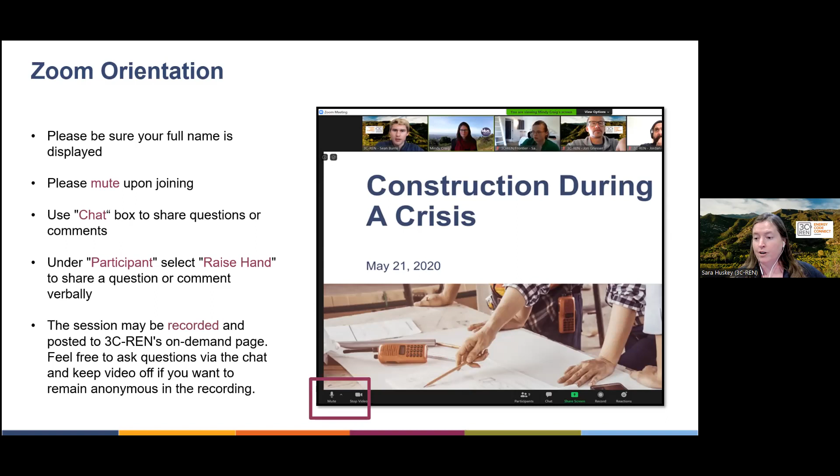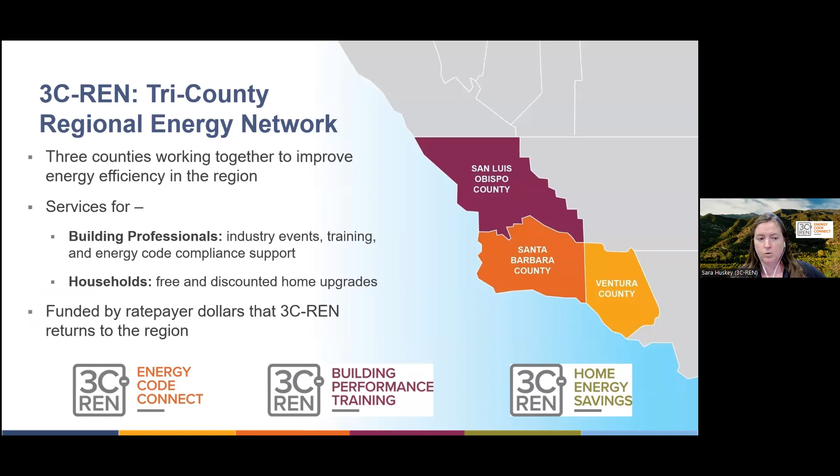A few words about who we are. We are the Tri-County Regional Energy Network, also known as 3C-REN. We're a collaborative partnership between San Luis Obispo, Santa Barbara, and Ventura counties, working to improve energy efficiency in our region by offering free programs and services for building professionals and households. 3C Ren is funded by ratepayer dollars, which are collected through the public goods charge found on our utility bills.

3C Ren currently offers 3 programs. The first is our Energy Code Connect program, which this course is brought to you through. This program offers our Energy Code Coach service, which is over-the-phone, online, and in-the-field support for Title 24 related questions for both residential and non-residential projects. Then we have our Building Performance Training program, which serves building professionals by offering technical and soft skill trainings relating to building science principles and high performance buildings.

And then we have our third program, which is our Home Energy Savings program, which incentivizes contractors and helps residents save money to make their homes healthier with energy efficient upgrades through incentives and rebates. And with that, I'll pass things over to Jennifer.

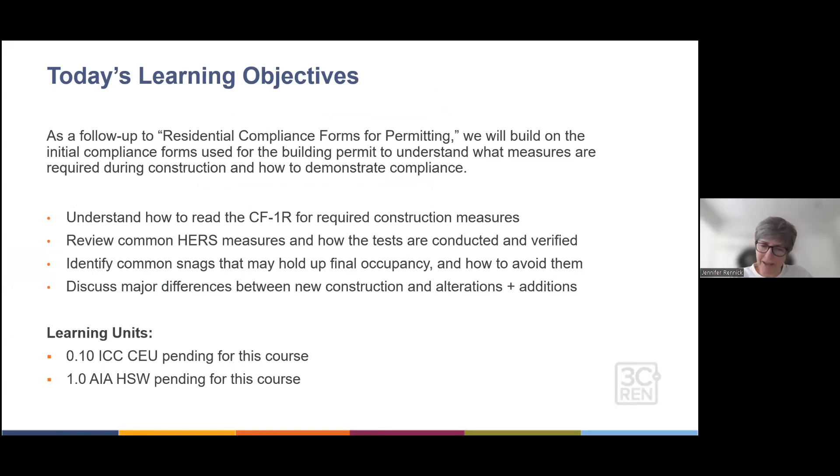We did a class just recently, a few weeks back, and it was the overview of the forms for residential single family construction on the permitting side. We mostly talked about the CF1Rs to show compliance with the energy code and gave everyone a heads up on what a plans examiner might look at, and also gave architects and others an overview of what these forms look like and where to find the information needed for a project.

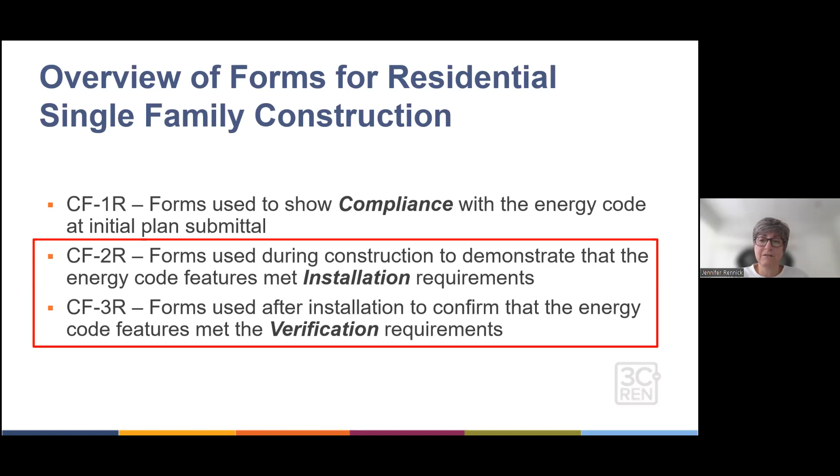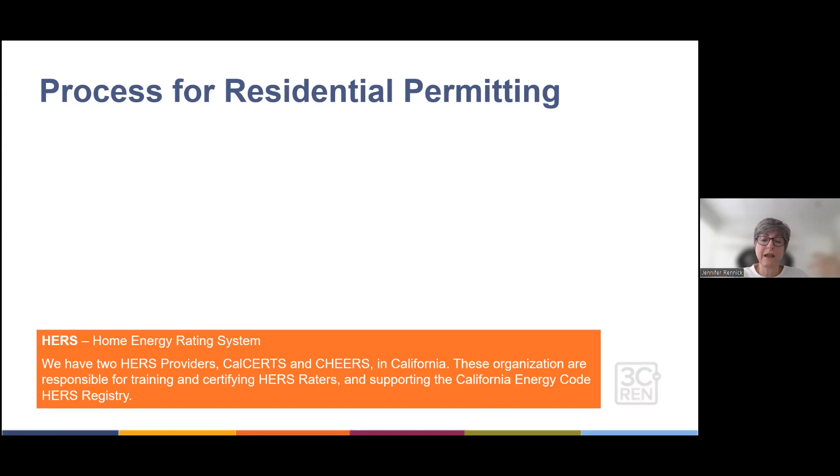Today we're going to specifically look at some of the CF2Rs and CF3R forms for installation requirements and verification requirements. California has HERS, and I could tell from most of the chat that most of you know this already, but in case we have a few new people joining, and also because it's being recorded and might be posted to the website, I'll review that HERS is Home Energy Rating System. In California, we have 2 HERS providers currently, CalCERTS and CHEERS.

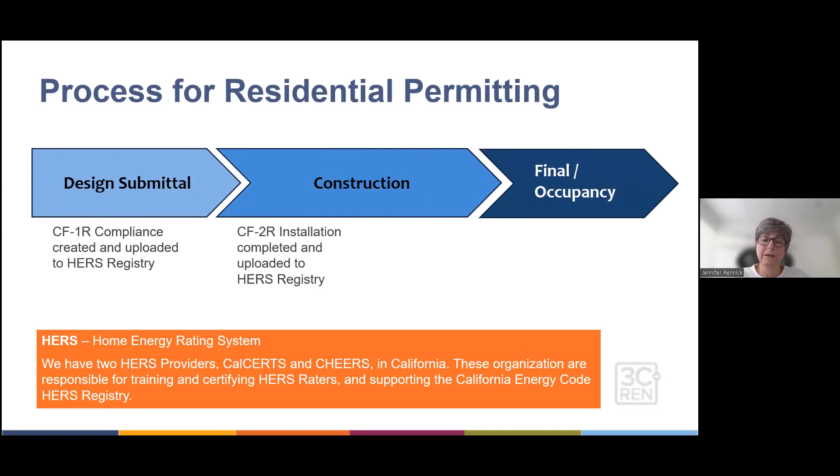These are the organizations responsible for certifying our HERS raters and supporting the California Energy Code HERS registry. The big picture process: you submit your design for permitting, and you'll have your CF1R compliance report created and uploaded to the HERS registry. During construction, you'll have your CF2Rs for installation completed and uploaded to the HERS registry, and your CF3Rs for verification completed and uploaded to the HERS registry. Then the building official can confirm your CF2Rs and CF3Rs are uploaded and signed, and CalCerts has what's called the PSR—we'll take a look at that slide coming up. Once that process is done, you can get your final occupancy.

On CalCerts, this is just an example from a project I have on CalCerts. What I could see on my end as an energy analyst is a list of the CF2Rs and 3R forms that would be required. This is not an exhaustive list, but these are the ones that populate for the particular project I was working on. And you'll see things like electric ready requirements.

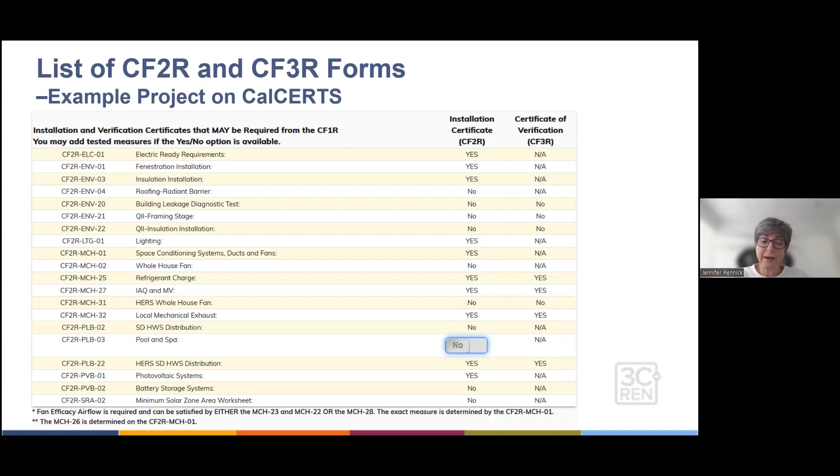CF2Rs required? Yes. CF3Rs required? No, not applicable, etc. This is what we're going to see with your plans examiner. I think we have a plans examiner in training. A lot of times on the planning and building side, if you go onto the CalCerts registry, you'll see this PSR report. Okay, Paul, jump in and tell us a little bit about it.

This is usually seen towards the end of the project when you're calling for final. Jennifer, can you back up 2 slides? Let's go one more. Yeah, here.

This is the theoretical flow of things, but oftentimes as a rater I get called right before final because the agency is asking for certificates and paperwork. So to make it go more smoothly, us raters would like to ask people who are creating energy compliance documents to communicate to their client, i.e. builder, architect, whoever, that this needs to happen. Let's try to put it right on the plans so that this special inspector known as a HERS rater can get in front of it and communicate with the various subcontractors what needs to happen, so everything flows smoothly and we don't have any hiccups right at final when people are sitting in their moving van outside on the street, waiting to get finals.

I've literally been in that situation before. So skip ahead 2 slides.

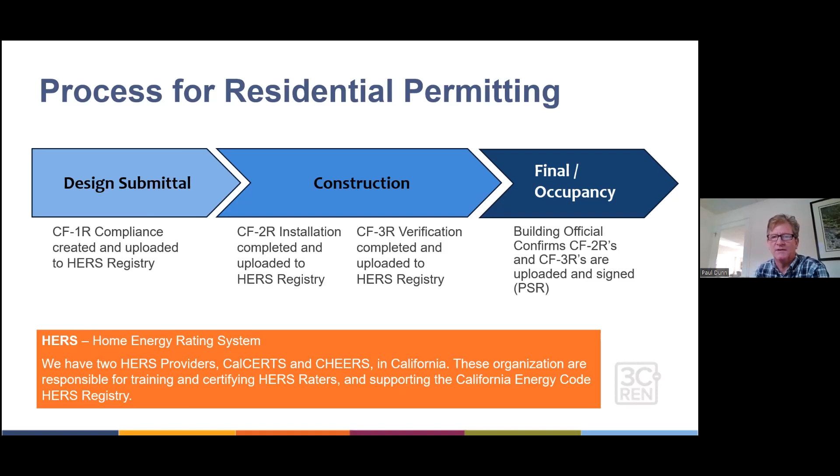At that point in the game, say the building official is looking at the project summary, he wants to see, for the most part, what we call all green dots. That indicates to them that all the subs and their responsible forms, the CF2Rs, have been completed either by the sub or the rater on behalf of the sub or the general contractor, because they can oversign pretty much anything in terms of an installation certificate. As a service, as a HERS rater, I generally do that on their behalf just to make it go more quickly. Then we ask that sub to go into the registry and approve that data uploaded on their behalf by me, because I'm at the site anyway collecting data and uploading it in the comfort of my office come close to final.

So we're ready for the next one.

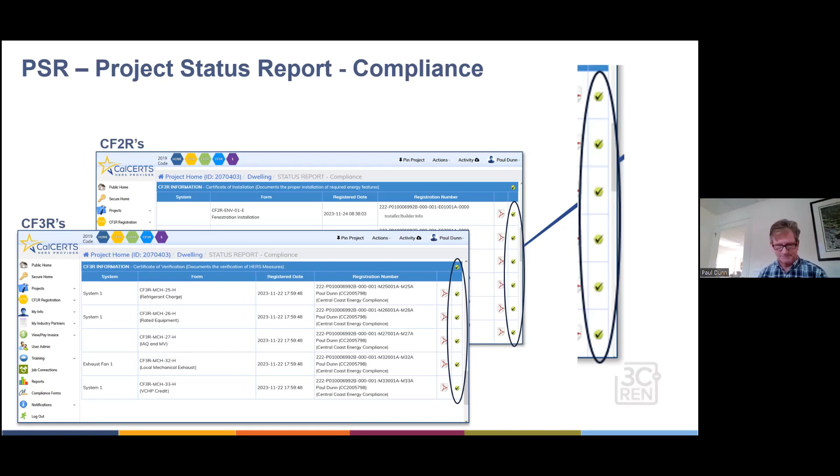As energy analysts consulting to builders and architects, one of the questions that comes up is, how do I know what these forms are? What are the requirements? What are you talking about? It seems like a lot of it is learned through trial and error and experience. I've even had architects and builders tell me, I've learned what to do because I get corrections on plan check, so over the years I've learned what I'm supposed to be doing.

So my feedback is, is there a way to not bury this so deeply into the website? Say that with a question mark, because I know redoing a website is a big deal, but it would be cool if there would be a way for folks to navigate to this without scrolling down, because they ask me and I point people to it.

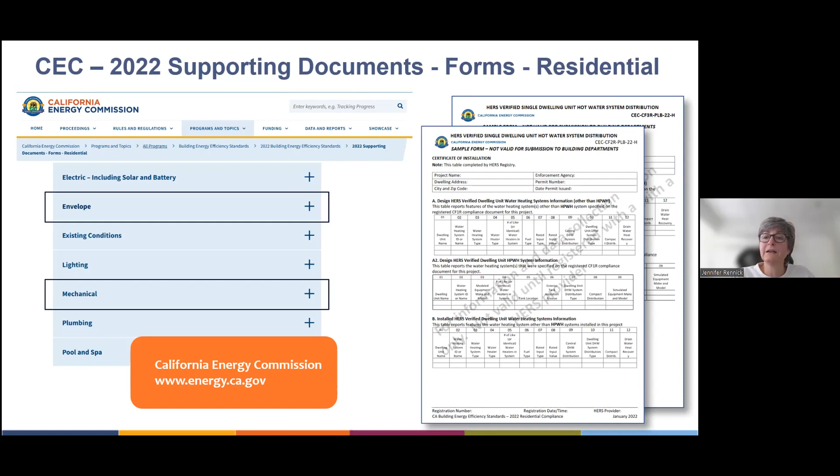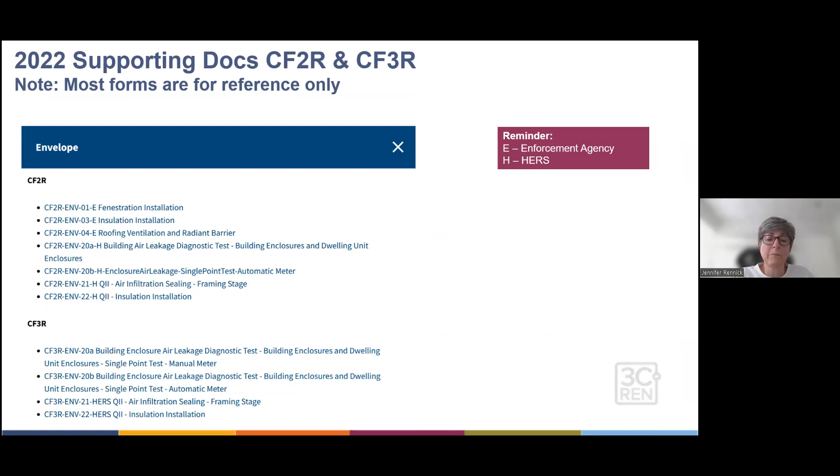So to give you an idea of what this looks like, when you click into the website on envelope, for example, these CF2R and CF3R forms populate in a list like this, and you can click on this list and click on each item, and then you'll be able to download that informational form, watermarked informational purposes, but at least it gives you all the information.

Today, specifically, we're going to take a look at the form that deals with the insulation installation and the corresponding QII, quality insulation installation forms.

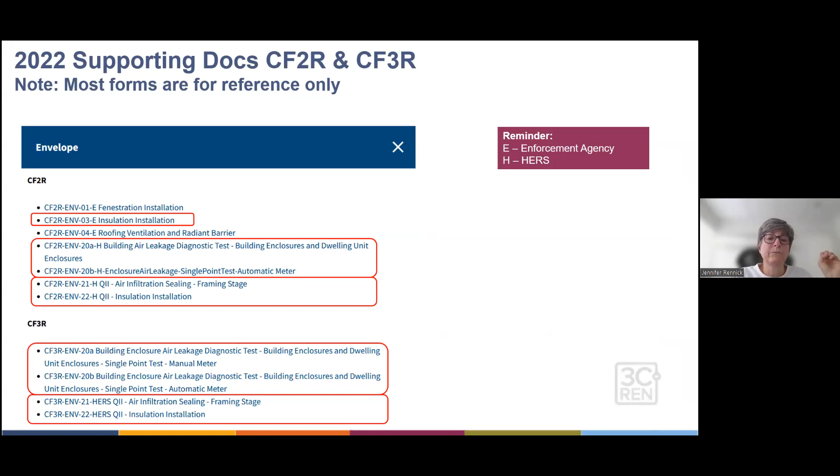The first time I ever looked at this, it was overwhelming to me. But then when I dug into it a little deeper and started to organize it in my own mind, maybe even a formatting issue if the CEC has control over this, is maybe just separate it out a little bit so you could see more easily that it's really not that many, in the sense that there's groupings, like the MCH 1 series for different conditions.

You're all going to get a copy of the slides, maybe share it with other folks you work with. This may help them see the hierarchy in it.

Today we're going to hit on the forms that deal with QII and building enclosure, which overlap with that. Then we're going to go into a little bit about duct leakage testing, what it is, and there's supporting forms that go with that. We're going to take a look at local mechanical exhaust, kitchen hoods specifically, just that one, and a little bit about variable capacity heat pump compliance credit, because that's a great credit.

Specifically, we're going to look at duct leakage. These are the supporting forms highlighted in mauve, how the color looks on my screen, that support that. Some of those other forms can be triggered with other systems, like refrigerant charge verification.

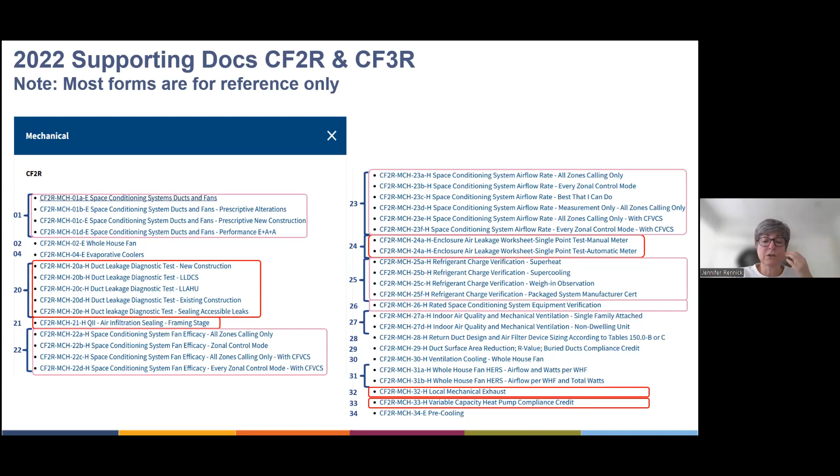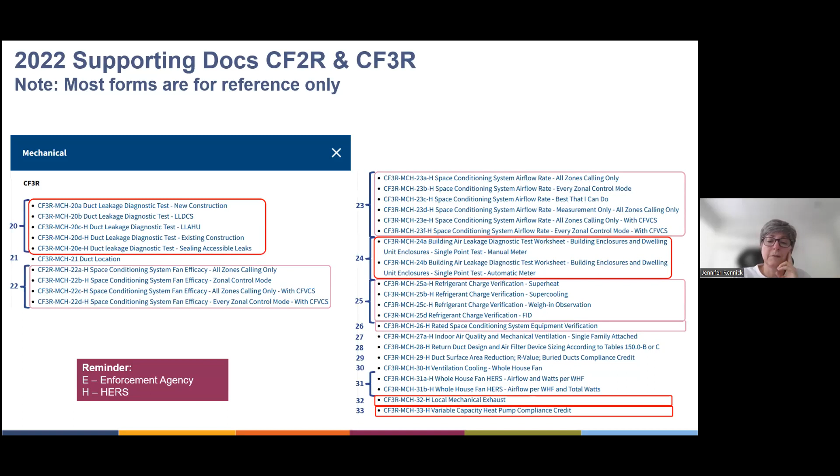Okay, so just the CF3R, same thing. There's a hierarchy to it, there's a grouping to it, and we'll hit on the building leakage, enclosure, duct leakage, local mechanical exhaust, variable capacity heat pump credit, and those supporting items.

If I may add - yeah, absolutely. So to the audience, don't let your eyes glaze over. There are a lot of forms there on the previous slide, but a lot of those forms are just kind of hovering in the background. You'll probably never have to deal with them. Your HERS rater will upload what is pertinent to the project.

And if there's any questions early on, say in CalCERTS training, they use the term rater as educator. So that rater should be able to explain to you, here's how we're going to complete this form, here's who's going to do it, and this is going to be the process. So don't get bogged down in 26 forms on a screen - really only 2 or 3 of those for the most part are going to be the most important for your project.

And when you share this kind of information with other folks, for those of you who are also HERS raters or HERS rater and plans examiner in training, really what I wanted to show you is that that information is available on a website. So if you know from that HERS rater what you need, or what kinds of things you're going to be looking at, you could share this with the architects as well, because sometimes there's information in that they can get into their drawings to make their world easier, but they won't go through the whole list. So you maybe help them by targeting specifically what they need.

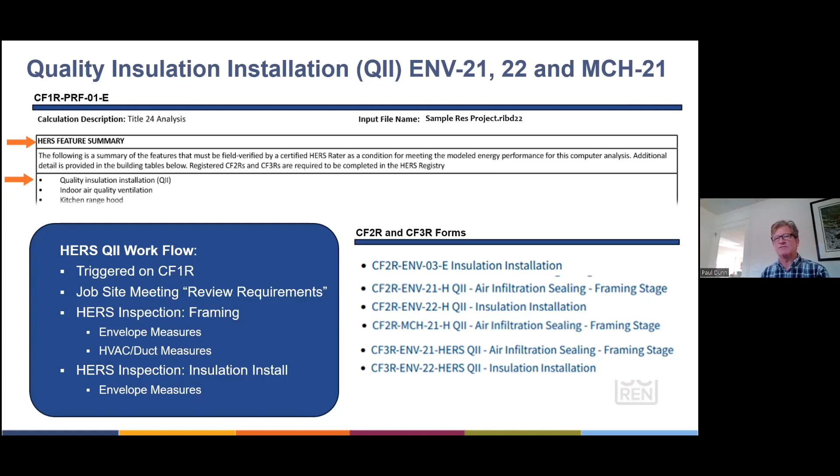Your rater should be able to walk you through that process as well. We want to get out in front of it so there's no problems down the line in the framing aspect, because really QII involves two major avenues: the first being air sealing, the second being the actual installation of the material. Under air sealing, if the rater can walk the job and say, okay, we have a unique framing situation, here's what we're going to need to do to get in front of that, it is really helpful so there's no problems down the line.

My example to Jennifer before, and I see this a lot on jobs, is in tract homes you'll have a lot of preformed fiberglass shower inserts. A lot of times they show up on the job really soon after framing, but we want to make sure we have an interior air barrier on the other side of that tub to make a QII-style sandwich, so that we have insulation contact on all 6 sides of a framing cavity. So let's get some kind of approved air barrier on the inside of that wall before you set the tub. That's why we want to walk jobs really soon in this process.

One of the first forms, this insulation installation form, it's a non-HERS form—it could be the installer or the GC. But I understand a lot of times you'll help folks get this completed. The reason I like to print this out and remind folks about it is because it's just chock full of really good reminders and information on what it's going to take for QII.

I'd agree. I think for the most part, the insulation contractors I work with in San Luis Obispo County are good with their CF2R ENV 03 because they know what material went to the site. Through years of training, I've gotten them to go ahead and upload that form. I chase it later with my CF3R ENV 21 and 22, which are kind of like the current forms for QII. So then it all kind of dovetails nicely.

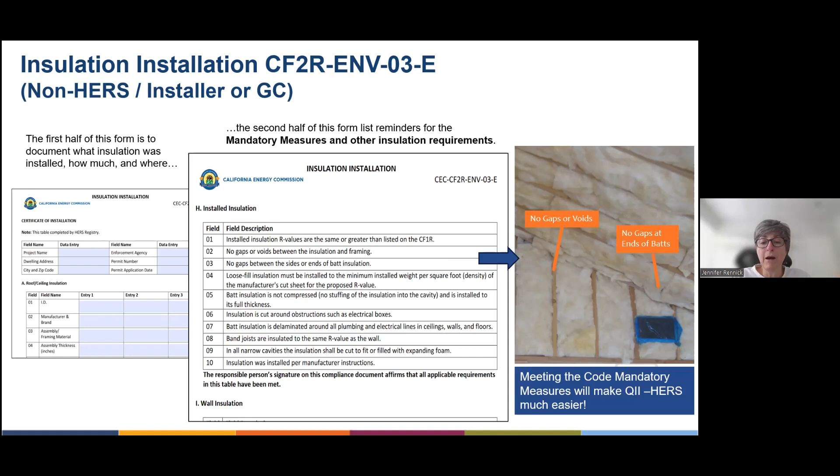For example, this first form, the ENV 03—yes, it addresses basically insulation installation, but prior to that, even though it's ENV 21H, the CF2R, this one's got to address the air sealing. It's part of QII, but a lot of this has to come before the actual insulation. So make sure this gets eyes on it before you start rocking or drywalling your job.

The rater needs to be there before you do that. I really think the rater at a minimum has two, most likely three visits to the site: a pre-walk, an air sealing inspection, maybe a fourth, and then a day-of-installation inspection, and then a final visit when they come back to do other measures. They can verify attic insulation at that point, and make sure they're meeting their R values and that all the boxes are checked.

Another great resource is the U.S. Department of Energy's Energy Efficiency and Renewable Energy website. They also have a great resource for how to do air sealing, especially air sealing for retrofits, which I find handy.

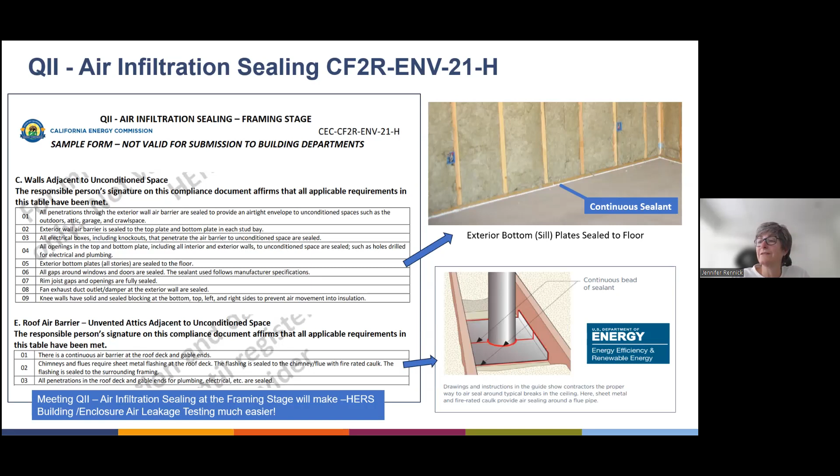Xavier says one of our fellow HERS raters does a PowerPoint for his folks at that review/construction on-site meeting. That's cool. Continuing on with some of the CF2Rs for air infiltration and air sealing—these are, that's a great picture that Paul shared with us from one of his job sites.

It specifically applies for new construction and alterations.

In an alteration situation, I put a graphic at the bottom right for folks to know that sometimes when you're doing those altered ceilings, and it's on this QII list, if you can't access those lights, if they're not ICAT rated (insulation cover rated), you can buy a box or create a drywall box with continuous fireproof sealant, keep it 3 inches off the light fixture, etc., lump your insulation over it, and continue on with the QII.

Anything you want to add on that, Paul? Yeah, one little caveat is fire sprinklers. Some manufacturers do not want you messing at all with their penetrations because of requirements in how they install things. So item 03 on that checklist, you might have to dance around or work with the manufacturer to see what you can do to seal those penetrations. There are new designs coming out for fire sprinkler systems, and that probably needs to be done on a case-by-case basis.

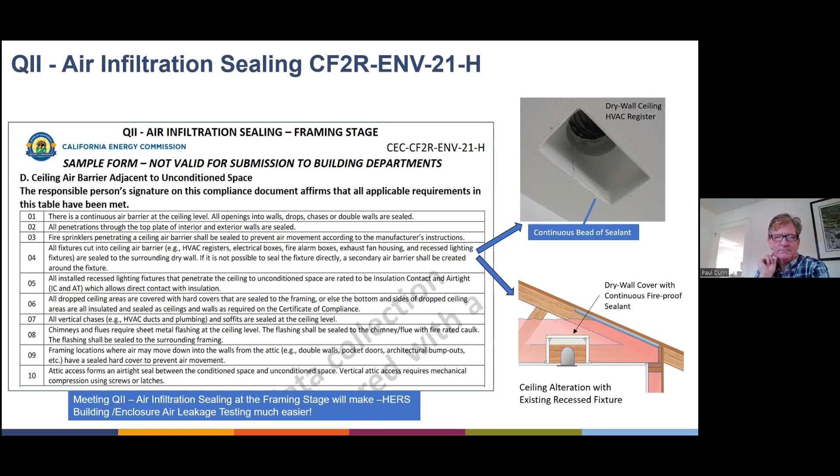And Paul, a lot of these things are the types of things you would cover in that meeting when you get those team players on site, and if you know, for example, it's a retrofit, or if you know sprinklers are going into that project.

Correct. So on this slide, this meeting that I had with the installer ended up not being passed down to the actual installation team, and they came in with blown cellulose that didn't quite meet the measure, so they had to come back. That's what we're looking at here with my piece of plastic that I've used as a quick and dirty tool to quickly measure insulation depth.

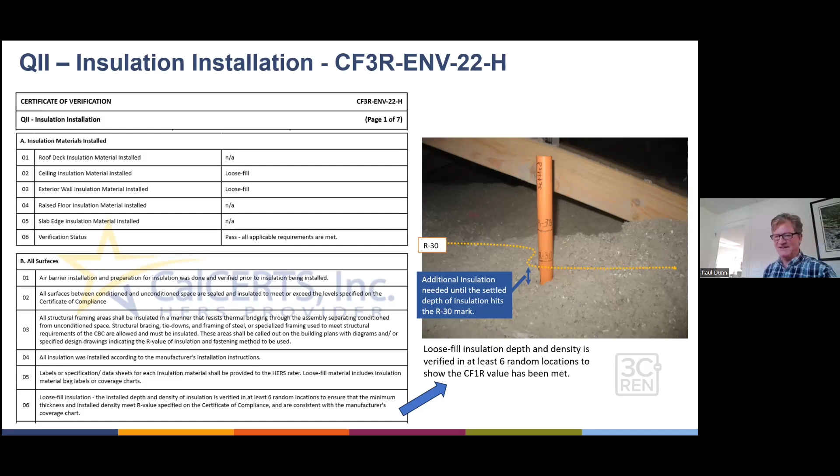But did people hate to do it? They did come back and do it, and of course you have that CalCerts watermarked CF3R for it. They hate to come back, but they learn pretty quickly when they're losing money or breaking even, because it is what it is. You have to do the minimum. It's not that difficult.

So this is kind of the basic review of the process for QII: those CF2Rs and CF3Rs are complete and the project can obtain final occupancy approval. Of course, your HERS rater works with everyone, they see the watermark on all those, and the authority having jurisdiction will see a pass on the list of required forms.

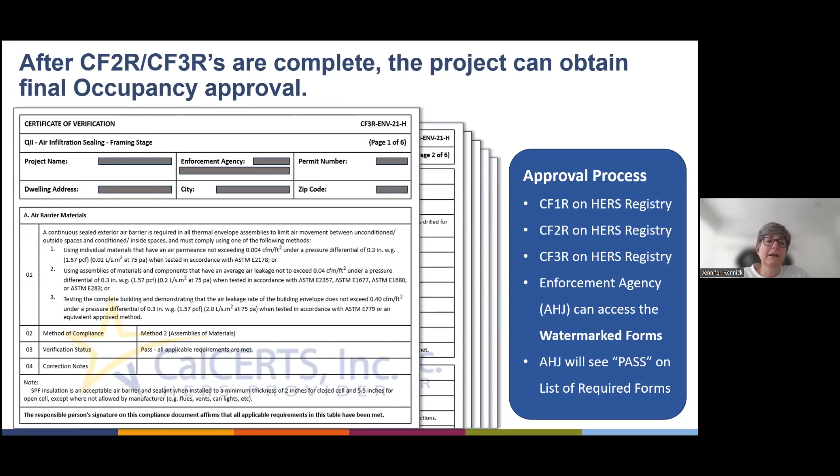And we're going to now move into the building enclosure air leakage. This also hits into some of the envelope ENV forms and the mechanical MCH forms. Again, on that CF1R, you look at the HERS feature summary, and in this case, building air leakage, reduced infiltration is required. If you go further into the form, you'll see your building envelope HERS verification, kind of a little cheat sheet there. In this case, yes, this particular project will have building envelope air leakage required.

In this case, we had a very tight house, so we got the measured air changes -- that means the changing of air of the whole volume of the space -- down to 2 air changes per hour. There are several CF2R and 3R forms that go with it.

Paul's going to dive in a little bit more on that HERS workflow, and then he's going to show a great slide for building air leakage testing in case that's new to anybody on the call.

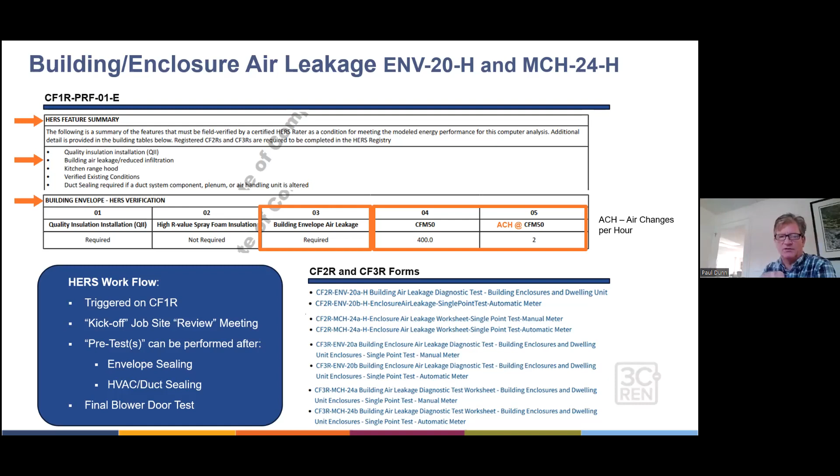Sure. I just saw a question about whether it's standard procedure to have a pre-con meeting. And I am saying yes, please -- let's have a pre-con meeting if the EC is asking for QII. That way everyone's on board.

Also, I want to address one issue with standard QII in a tract home development. I'm very much against sampling protocol for that, because if given the opportunity, I've found the trades will do less than they need to achieve QII. So, for example, in the few tracts that I've run, I pretty much just promote 100% testing so that the consumer gets what they're paying for -- a thermally efficient envelope and QII level insulation.

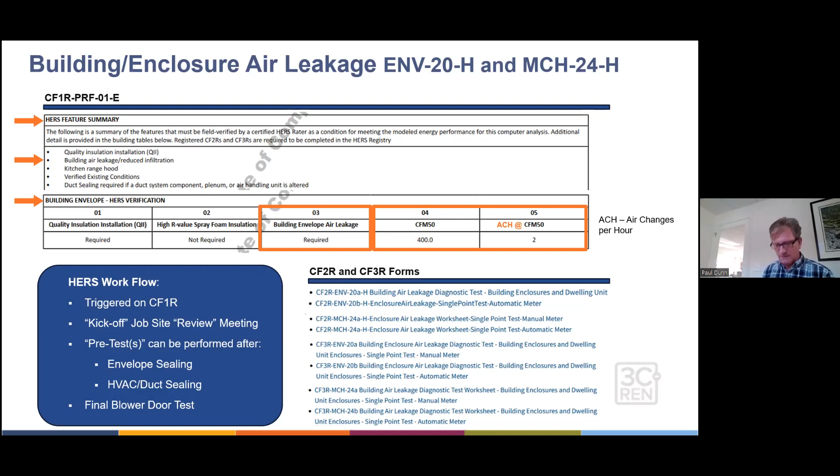Okay, so for air sealing, blower door testing is not as big a credit as it used to be, I understand, but let me back up. For multifamily, of course, we have compartmentalization testing where we use a blower door to test the air sealing qualities of each dwelling, because we don't want air sneaking into the adjacent dwelling and so on.

So in order to ensure that we pass that, we have to do a really good job at air sealing—sole plate, all penetrations, and so forth—so there's no communication between dwellings. And in a single family, say custom home, that is thermally efficient with no air going from nasty places to good places. An air changes per hour of 2, which Jennifer and I discussed yesterday, is a pretty tall order in standard construction techniques. Not that it's impossible, but it takes a lot of attention to detail.

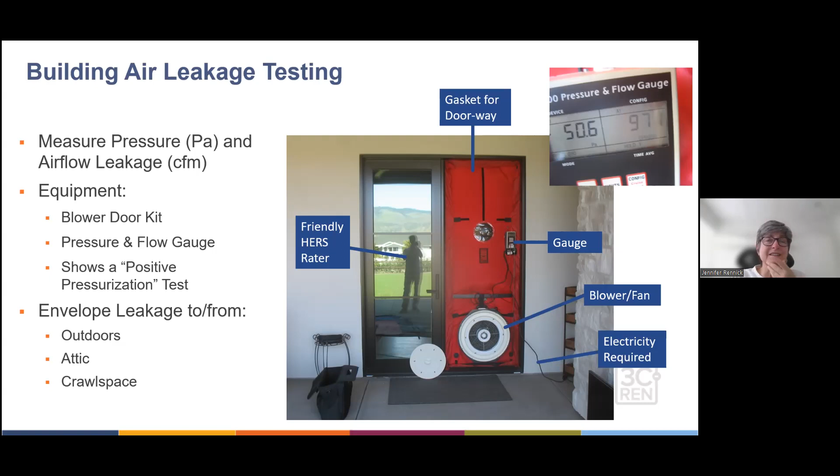I get that question a lot from architects—they'll say, oh, do I have to have drywall up before we do the tongue and groove ceiling? I pretty much just say yes now. I just shortcut the discussion and go, yes, you need to, because first we need an air barrier. So where's your air barrier? I have to make sure—is it the interior drywall, or do you have a whole roof construction system? But we'll look at that a little bit on our very last slide, on air barrier.

There is some emerging technology there—I think there's a service running around with a fogging device that can essentially fill in the cracks, either at frame or after frame, to make a house tighter and tighter. There's a concessionaire in this county that does that. So it is possible to drill it down to a really tight envelope; you just have to put more money into it and a lot of attention.

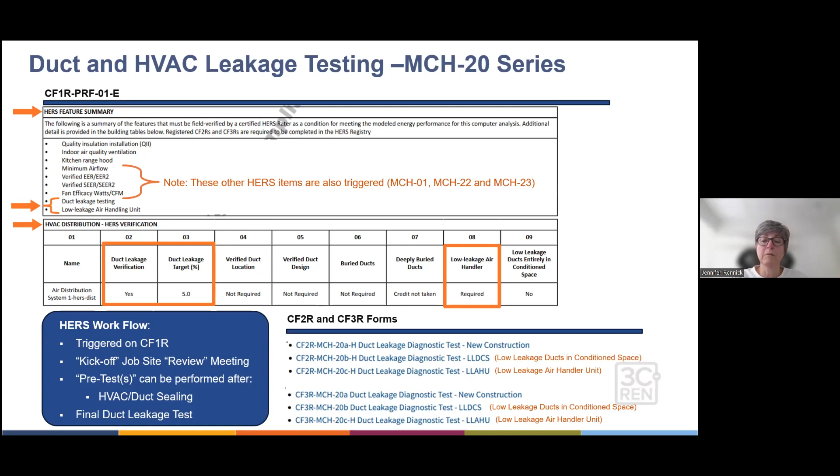This is my bragging point: I've done over 3,000 duct leakage tests in the past 16 years. I can pretty much do it with my eyes closed. And it's not just duct leakage, of course. There's HVAC testing, which is more common in the valley. In our climate zones here, 4, 5, and 6, we started doing duct leakage testing 12 years ago. Then other tests can be done for above-code measures like refrigerant charge, airflow, and fan efficacy - those kind of came along for the ride, but now they're more standardized as the code increases in stringency. So it's more common now for me to do refrigerant charge and so on. But anytime in our climate zones we have new construction with cooling, we have to do the airflow and fan efficacy testing.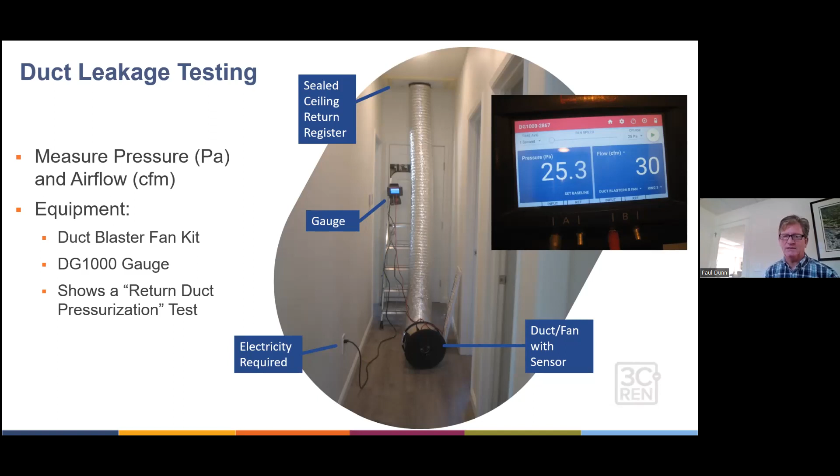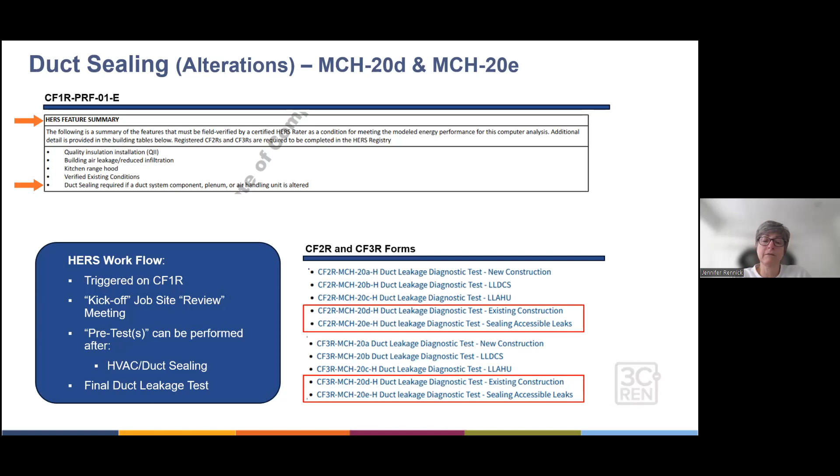There's a workflow to this that Paul's going to review, and we're going to take a look at what the quote-unquote smoke test is. Although it's not real smoke, it's theatrical fog.

So you start with a standard duct leakage test at the current alteration criteria - a 15% leakage test. If that fails, the rater goes to a 10% leakage-to-outside test, combining the blower door device with the duct leakage tester. You're able to determine how much leakage is inside the pressure boundary versus outside, with a 10% maximum. If it fails in that instance, we introduce the theatrical fog to the system with an HVAC technician on site to track down any leaks he can access and seal those in accordance with the protocol. I've done maybe a dozen of those in the last 16 years.

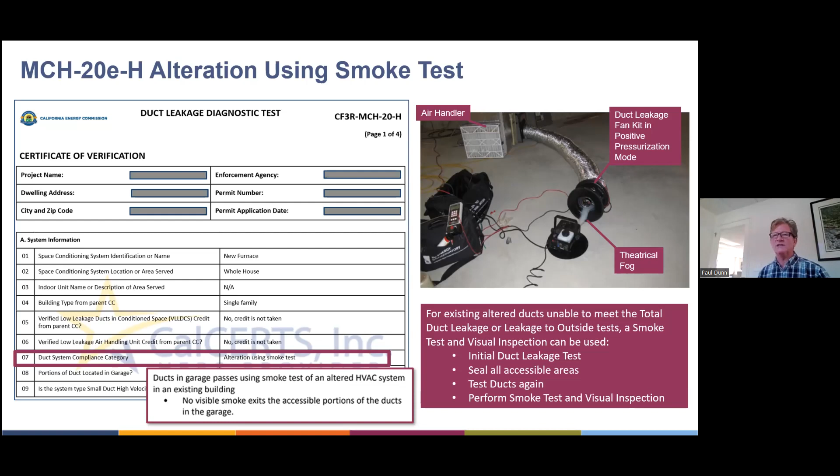Because if you have return side leakage in your air handlers in the garage, and you've got a can of WD-40 open or whatever, you could be essentially introducing contaminants into the dwelling. So the protocol is that when you're doing your smoke test or fog test, you really make

sure that the air handler, any ducts, plenums, and so on are really sealed well in the garage area. Okay, and then keep going. So here we are, this is new construction. Yeah, back in the day, people just put their boots on top of the drywall, and they left

the site and came back later and put on the grills. Studies have shown that there's a significant amount of leakage at that interface where the terminus of the duct terminates, your standard sealing situation. So this is a box every rater has to check and visually verify at the job, that you've done a good job sealing those terminations.

A lot of installers prefer to use some kind of tape. I think that some kind of caulking would do a better job, but HVAC installers are just more common or more comfortable using tape. The language is 'sealed to the drywall' in the code, so it really doesn't matter as long as it performs. I think for longevity's sake, I would prefer some kind of latex-based caulking, but it really doesn't matter. Is it sealed? Does it pass? That's what we're after.

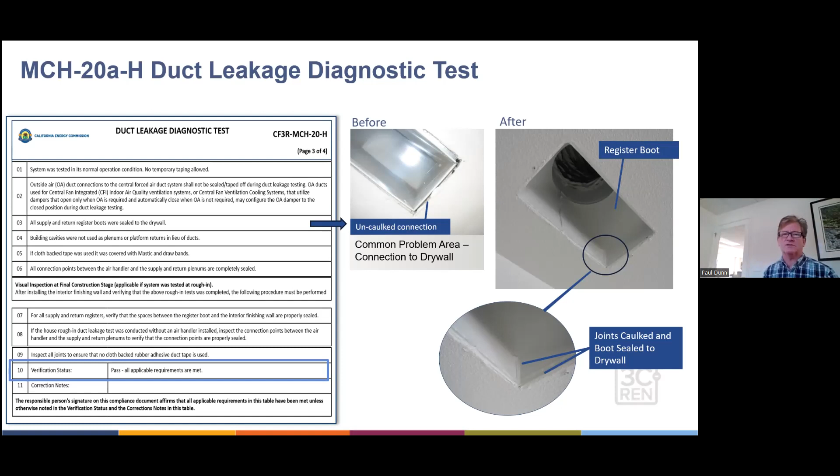Same goes for what's up in the attic. This is just good workmanship. You want to make sure that ductwork is substantially sealed, down to like 0 CFM coming out of what looks like the supply plenum. And there's the mechanical code they must comply with, which I think recommends or specifies

that there's a drawband on the inner collar, in addition to a wrap and a half of UL approved tape and/or mastic, and then the outer insulation collar goes on with the same, a drawband and a wrap and a half or additional mastic, to really make sure that thing is going to be on there for a number of decades.

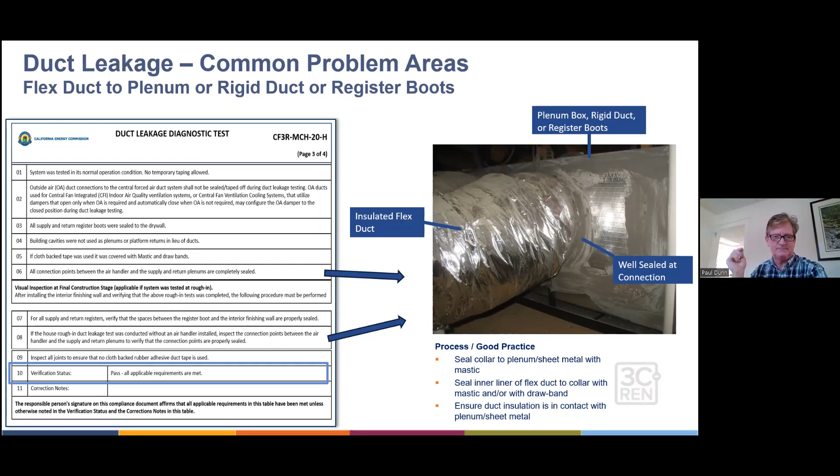With this whole thing, you're going to have like that MCH-01 form, but it's got the E on there, meaning your HERS rater doesn't have to deal with this one, but a lot of times they will. And then that'll be followed up by the fan efficacy and then the

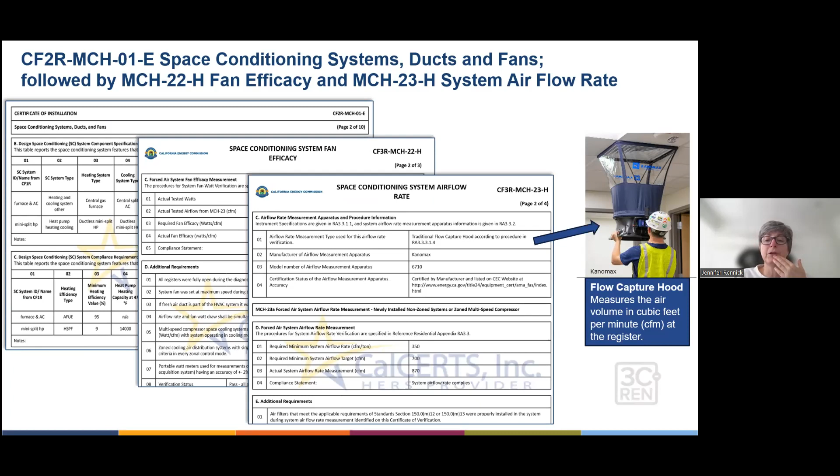system airflow rate, which uses a flow capture hood. And I didn't have a picture of Paul doing this one, so I borrowed this one from the manufacturer, Kanomax, but we're not brand specific here. The reason why Paul doesn't have a picture of him taking an airflow measurement is I didn't have a third hand free to take a picture.

Now, these two forms are important because really these tests are hand in glove. They have to be done within 5 minutes of each other. You measure your airflow first. You get your readings—say on a 3-ton system, you need to move at least 1,050 CFM, i.e. 350 CFM per ton of cooling.

And then you put down your device and you go either out to your revenue meter, or say you have an inline watt meter in the attic that takes the pigtail plug from the air handler, goes right through your little Kill A Watt-style watt meter, and you take that measurement down. Then you divide the number of watts by the airflow, and you get a calculation. So current code is for standard split AC, you cannot have more than 0.45 watt per CFM when you're running or calling for cooling. What do we have, a question here?

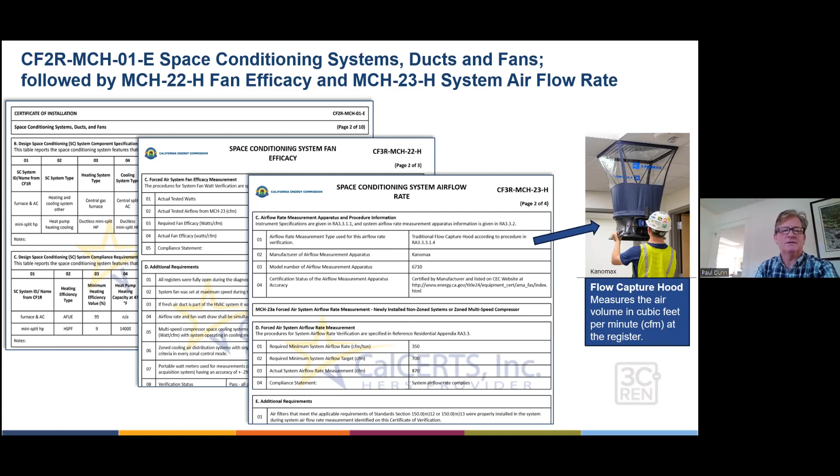Okay, I think we have a couple comments so you can take a look at.

Okay, so we're now moving from those MCH forms into the local mechanical exhaust. Specifically, we're going to talk about the kitchen range hood here.

And part of the reason for that is because if you take a look at that CF1R, you see in the HERS summary that a kitchen range hood test is going to be required. However, there isn't anything else in the CF1R that tells anybody how much ventilation, what size of range hood's going to be required. It's in the energy code. Your energy consultant can figure this out for you.

For folks dealing with architects, or if you're an energy consultant, remind the architects or builder that you can calculate this for them, or teach them how to do it. Otherwise, folks in the field aren't necessarily meeting this requirement, and it puts pressure back onto the HERS rater if the builder doesn't realize it's not spec'd out. A lot of times appliances like a kitchen range hood are just left to the homeowner, but the homeowner doesn't always know what to look for.

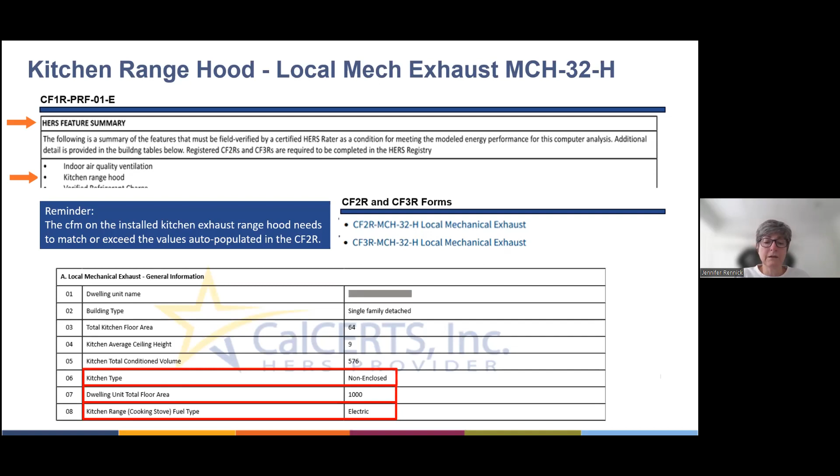As an example, taken from an already CalCerted form: the kitchen is non-enclosed, and the total unit dwelling floor area is 1,000 square feet, so it's an ADU, with an electric cooking stove. Go into the energy code and use Table 150.0G for non-enclosed kitchens. You enter the table by dwelling unit floor area, which in this case is 1,000 square feet, so we're on the high end of the 750 to 1,000 square foot range. Then go over to electric range hood versus natural gas range hood.

Under electric range hood, the answer would be 55% capture efficiency, or 130 CFM or greater, to be in compliance. For those not familiar with this table, which is new to the 2022 code, notice how the larger the floor area, the smaller the CFM or capture efficiency needed for both electric and gas. Also notice the gas range hood requires higher capture efficiencies and higher CFMs to comply. There have been a lot of studies by the EPA and others showing that natural gas and propane ranges still emit harmful chemicals and gas even when off, even with electric starters—they're just not tight enough. That's why there's a recommendation for higher capture efficiencies, and sometimes a continuous hood with low-level continuous evacuation or exhaust.

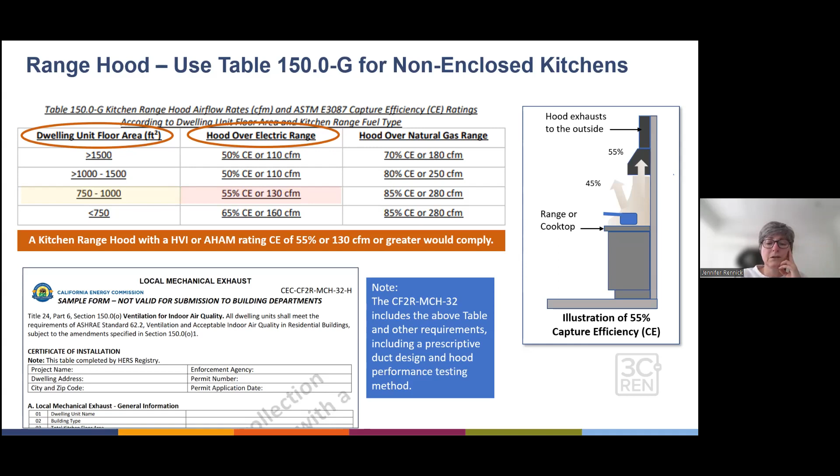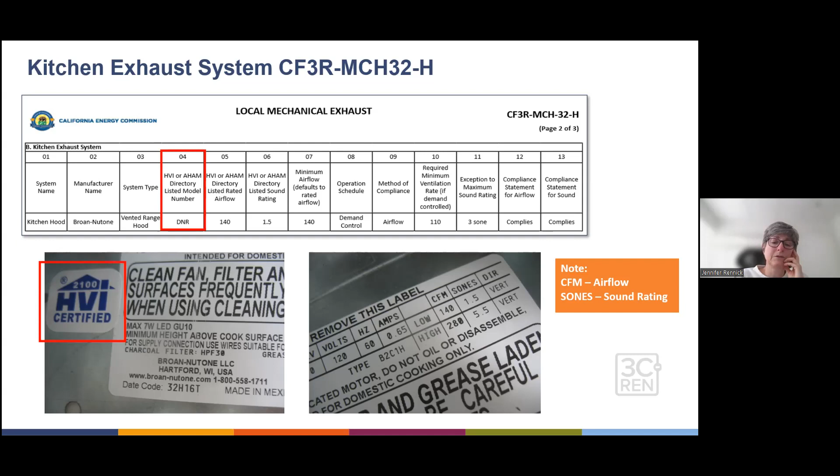Paul, when you get out to the site, you are looking for specific things. Tell us a little bit about what you look for. These are pictures from Paul on the job, by the way. So, right, to answer the chat, he's right on top of it.

We want to see the HVI label or AHAM label. As a rater, you go to a giant, huge Excel spreadsheet maintained by these agencies that has the model number and its rating for sound measured in sones, and what it's rated for in airflow.

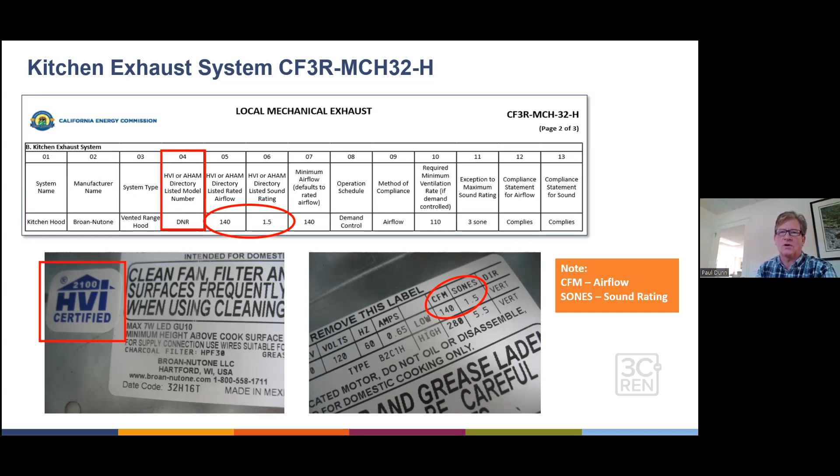I've turned away jobs where the guy just went down to Home Depot and got the loudest, crappiest kitchen hood fan he could find for like $69 and put it in his ADU. You turn the thing on and it was like you had to go outside to change your mind—it was just not good. He had to send it back and get something that met the measure of the code. So that's important, and I think the energy consultant needs to relay that, especially to a homeowner builder who's going to be shopping on their own, so they know what to look for to comply. And there it is.

Perfect. The last credit we're going to look at is the variable capacity heat pump compliance option, which I forgot to put at the top of the title. There's your MCH-33-H series, or rather CF2R, CF3R, and then a few other CF2Rs and CF3Rs that go along with it or are naturally triggered. It's interesting how this one shows up—let me back up. The variable capacity heat pump compliance credit.

As an energy consultant, we're finding this credit gives us a very big boost, a bigger margin than a lot of other credits. So we want to take this one, but it's rather involved in terms of what has to happen with the HERS person, and it does impact the architectural design. We notice we really have to work with the architect first to get a bunch of stuff on the plans, then coordinate with the builder and make sure everyone's on board before we finalize this—even though we've uploaded a draft CF1R to CalCerts, because we don't always know if this is going to go through. Anyhow, with that said, you're going to look under required special features.

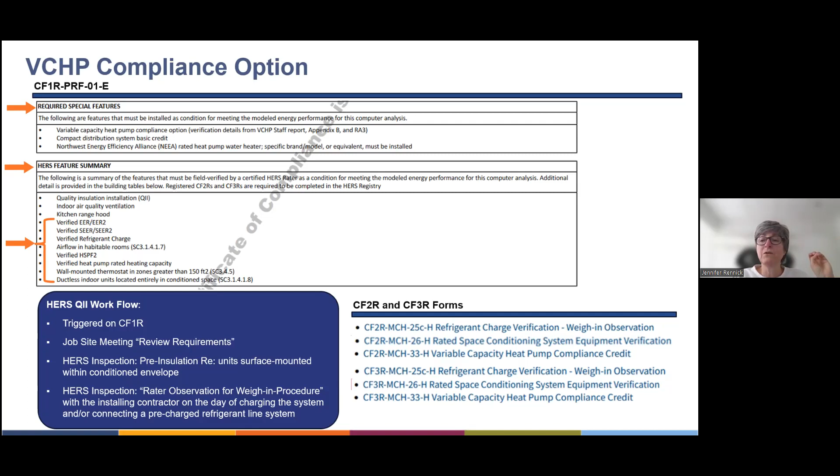Part of that is Paul's going to talk about, is we want your HERS rater out there right away, because those mini split ductless systems can be installed within just a few hours. They show up, unload everything, hook it all up, and they're gone. If you miss that window of opportunity to coordinate your HERS rater and the installing contractor, it's a bummer. Paul says, please coordinate the HERS rater and installing contractor.

The reason being, it'd be a lot easier for all of us to reduce the amount of effort to just verify refrigerant charge. This Fujitsu unit depicted there, say you've got one outdoor unit with 2 indoor heads, each mounted on a wall in a bedroom. So the sum of the line set is less than what's needed to add additional refrigerant. You basically just need to be there that day and verify with the installer that he's not adding or subtracting any refrigerant, because it's kind of pre-charged. If it's a different type of job and it's large, this pretty much just applies to the mini splits that I see out in the field.

One thing too, if there's other raters on here, there's this thing about the permanently mounted thermostat on a wall. I've kind of been dancing around that, because the thermostats they have are like in a little cup mounted on a wall, and you can actually take it out of the little holder and walk around the room with it. But I think for all intents and purposes, that is permanently mounted enough that it controls that particular wall mounted unit. So maybe there needs to be more analysis of the language the CEC is producing for that particular aspect of the measure.

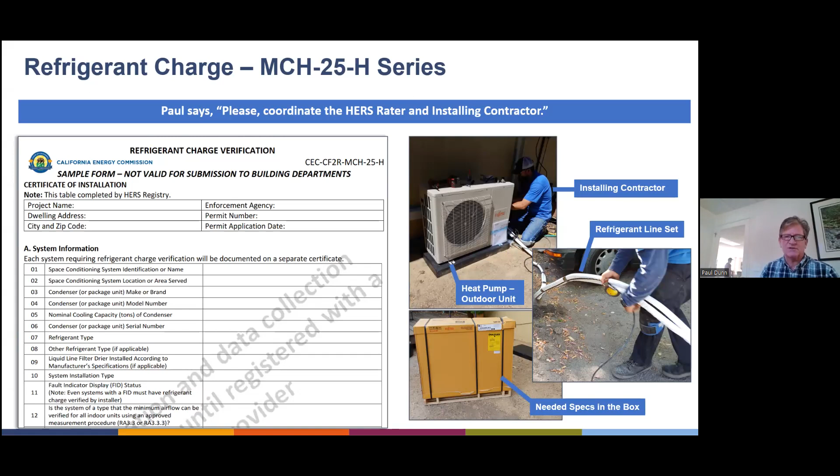Question mark. Paul touched on it too, part of that credit, yes, the thermostat. So the little gray note is up there.

Also, these units have to be installed within the air and thermal boundaries. You need to show that there's airflow to each habitable room, i.e. each bedroom and the living area, to comply with that credit. This example is an installation with a vented attic. The taped and sealed drywall on the interior of the walls, the ceiling, the floor, all of that was the air barrier, and then the insulation essentially is continuous around that by the ceiling, the walls, and under the floor.

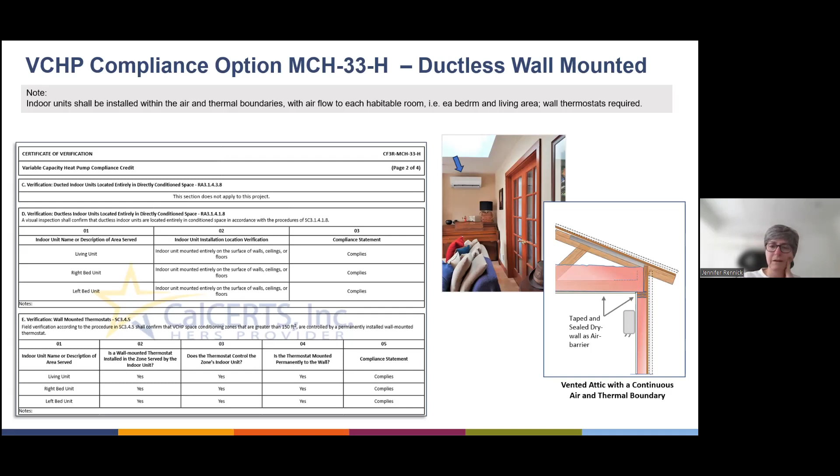Yes, thank you. Maybe that's why Xavier was raising his hand, because the way the language is in the code is that it has to be in conditioned space, every part of the air delivery system. So we've had to have contractors build an air impermeable box around that ceiling cassette, if you will. That's not fun for some people, and you get a lot of pushback. But I think for a two-story house, you wouldn't have to do it because you're, say, on a lower story, since it's still inside the thermal boundary. I think down the line, we're going to see products being introduced that will address this issue, so I'm hopeful that will make it easier for installers to comply with that particular portion of the measure.

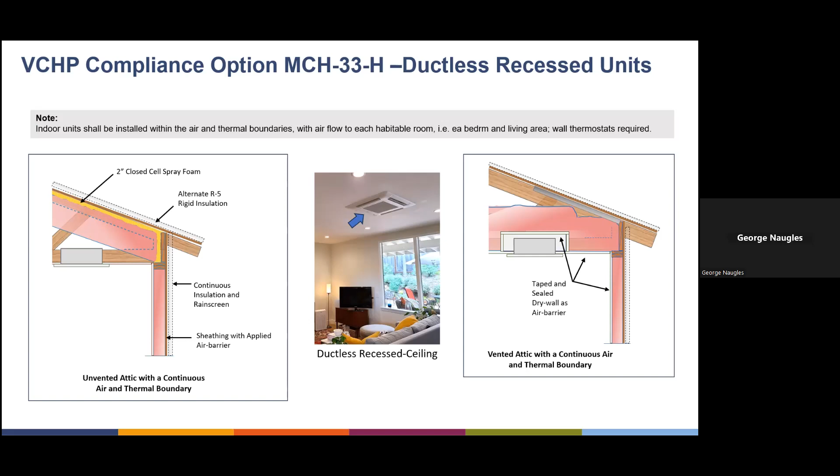I don't know if that helps. I think the big question is what really works for a particular structure. I like what you said about asking where is the deterioration and where is the real value to be recovered as you're moving forward retrofitting.

In my own old house, it was the floor - the floor was leaky as all get out. We had a popcorn ceiling, so we dropped the ceiling onto the old carpet and rolled up the old carpet with the drop ceiling and put it in the trash. Then we went through and said, okay, we're going to do it all from the interior - still a vented attic, we'll add more insulation in there, but everywhere we could, we tried to air seal it all from the interior. So we air sealed the floor, put in new flooring, did the ceiling, etcetera. I think it just depends.

All right, well, we are about 15 minutes after 3. Thank you all for staying with us and for all of your great questions.